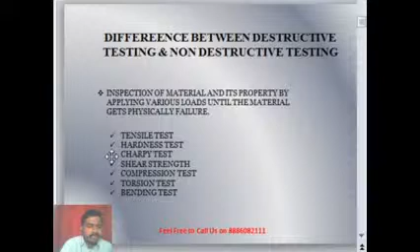So the disadvantages that we can discuss about destructive testing is the change in physical appearance, which cannot be used for further purposes. If I have a shaft of 10 centimeters, and I induce a destruction test for tension or compression on that particular shaft, I can't use it for any further type of operations or processes. Why? Because it has already changed its physical dimensions, so I can't use this.

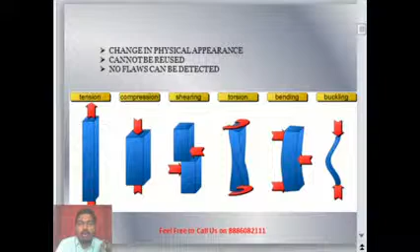And the third one is no flaws can be detected in this particular destructive testing. The flaws cannot be inspected or detected in destruction testing. The only purpose of destructive testing is to find the material property and material strength only. We can't find any single point of defect or any trace of defects.

And coming to non-destructive testing, here there is a small definition which everyone can understand, like any method for examining an object or a material or a job or a workpiece or a test specimen, anything, in any manner which will not impair its future usefulness. Why I mentioned many methods is, NDT is not just a single method, there are a number of methods involved in NDT. So that's why I mentioned any method.

So any method that you are going to use in NDT for inspecting a material, definitely it's not going to stop its future usefulness. Very soon after inspecting a component by NDT, you can also use it for its future purposes. That's why I mentioned a note, simply testing without destruction. We are going to test a component without destroying its physical mechanical properties.

And the result that we are going to get by doing NDT is, we can see whether there is any flaw or air gap or defect in a particular component. If there is a flaw in a particular component, we can't conclude that component is going to be accepted or is safe for future purposes. So before getting into market, any product or any material is going to be tested quality wise, and the test carried out for quality inspection is called NDT inspection.

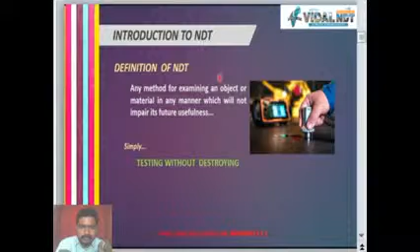And getting into detail, why NDT and where we are going to use this NDT. Firstly, we are going to detect the internal and external flaws of the component.

Internal and external, I specially mentioned, we can also find the internal components. Like if I have a 10 centimeter component, I can see whether there are any surface defects by our naked eye, but we can't see the internal defects through our normal human eye. But by using these types of NDT methods, we can find both the internal and external flaws that are present in the component.

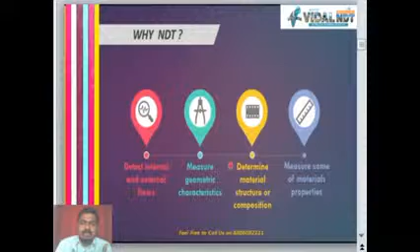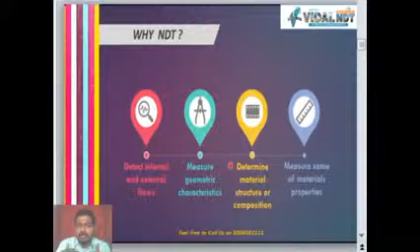And secondly, measuring the geometric characteristics. Measurement is nothing but, if we have a scale or a tape, we can simply measure any component. But there are some things that have to be measured only by using NDT. Why? Because if there are some internal dimensions which are very important, like the length, breadth or width of an aeroplane or a turbine blade, we can't see the length or thickness of the turbine blade by using a normal centimeter scale. We need other types of measuring devices like NDT.

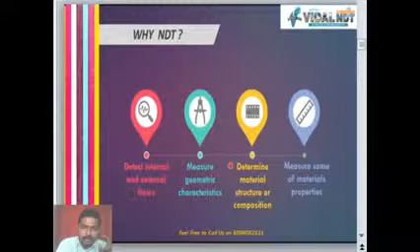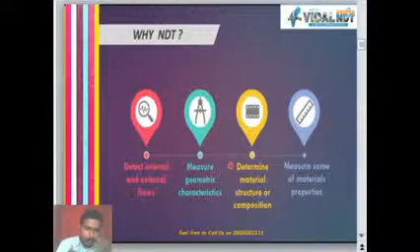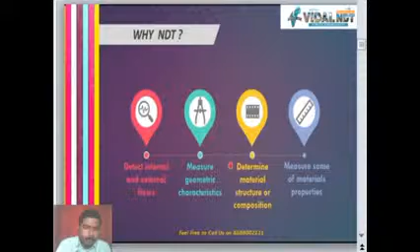In NDT there is a particular test called ultrasonic test, so by using this ultrasonic test we can also check the thickness of any component. Okay. And next, we are going to determine the material structure or composition. Like we have already discussed, in ultrasonic testing we are going to know what type of material we are testing, and what is the percentage of composition of one material to another. We can conclude this by using NDT testing.

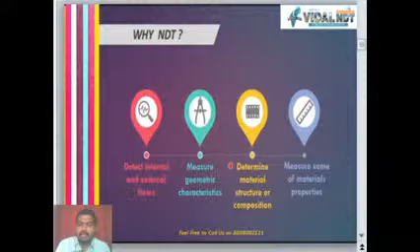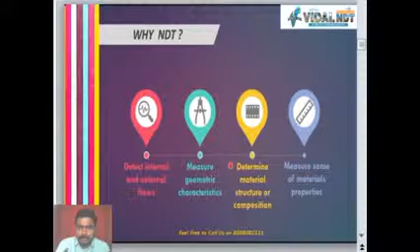And next, measure some material properties. Material properties relate to the structure, and by knowing the structure and composition of a material, definitely we will know the material property. But one thing I can say is, we are not going to check any physical or mechanical properties. We are just going to find the structure and composition, not strength and forces. Okay. And for the next slide,

the various applications of NDT: we can use NDT in aerospace industries, aircraft industries, automobile, forging, casting, chemical and petroleum industries, construction industries, electronics and food processing, marine, material joining, security purposes, metals and even non-metals, nuclear, ordnance, transportation and utilities. Hopefully all these key points are familiar. The points which I feel are non-familiar are construction, ordnance, utilities and even food processing.

So in construction, as I discussed in the previous session, along with mechanical industries, the construction field also has many applications and advantages of using NDT. So it's not only focused on the mechanical stream, it's also focused on the construction stream and medical applications as well. Food processing, in the sense, we are not going to inspect the food here. We are going to inspect the machinery or mechanical tools used in the process of food processing. And ordnance is like military tankers, etc., which come under ordnance.

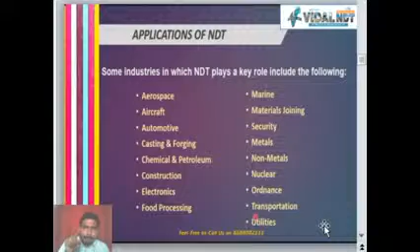And utilities, you can say anything. In any industry, it might be gas, water, or anything, any component or part individually we can call utilities, like pipe joining, L joints and T joints, anything. These all come under utilities. So we can also inspect these types of individual components by using NDT.

And the basic NDT methods that have been used so long and so widely: there are 6 NDT methods. So what are the 6 methods? Before getting into them, I need to explain why they have been categorized. Actually there are 14 types of NDT methods to do an inspection of a single component, but we are going to discuss only 6 in today's session.

Why? Because only these 6 types of NDT methods have been familiar for more than 10 years in mechanical industries, and only these 6 methods are much easier as well as much more useful, both on the financial side and the result side. Very low cost and very high effect by using these 6 types of NDT methods. And the NDT methods have been categorized into 2 different categories.

First one is conventional testing and the second one is non-conventional testing. The non-conventional testing is nothing but a quality assurance check, a process that is followed after the quality inspection. Not all industries need this type of testing called non-conventional testing; for example, laser treatments, resonance testing, photographic view testing, etc. come under non-conventional types of testing.

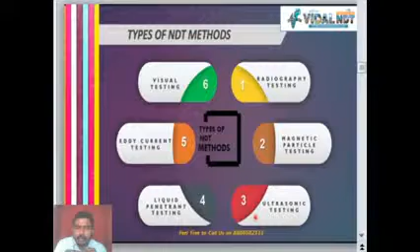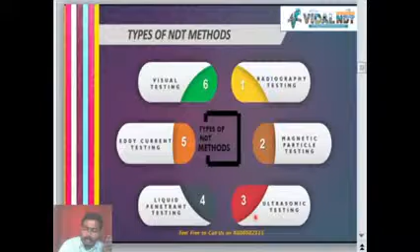So in order to know the length and other dimensions of the defect, we need to inspect through visual testing. Only then will we have a proper record of that particular defect, and then we can conclude whether it is accepted or rejected. Now we will go to the individual types of testing. The first and foremost is radiographic testing. As I said earlier, this is a type of test in which radiation is used to inspect a component.

Why? Because only X-rays and gamma rays have the capacity to penetrate into a component. Only then can we find whether there is any defect inside the component. No other radiations like radio waves or microwaves have the capacity to get into the component. Only X-rays and gamma radiations penetrate into the component and trace the gaps and structures internally, and make a note, and that note determines whether the component is acceptable or non-acceptable.

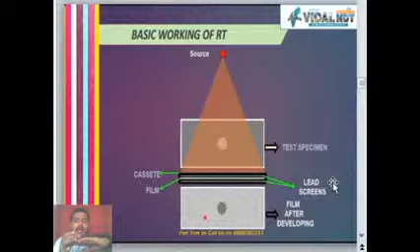We don't get results immediately after directing X-ray radiations upon the film - there are particular processes to carry out afterward. If this is the component and my hand represents the film, I need to induce radiations upon the component. These radiations pass through the component and fall on the film, which saves all those results.

To make sure we can see these specifications on film, we need to undergo a process called film development, which involves 5 different steps. The first is developing, then stopping, fixing, washing, and drying. After doing these 5 processes, we can see the image that you are seeing on screen right now.

After the film development process, the white colored image will turn into a developed film in which you can notice all the types of defects existing in the component. If there is no defect in the component, there will be no black color indications upon the film. Hope you are clear.

One more thing I need to conclude is that radiation testing is very harmful to the human body, but no industry is going to ask a man to die to do an inspection of a component. An industry definitely gets legal authentication or authorization for these types of testing, and makes sure the person who undergoes it is safe, with precautive and preventive measures against these radiations.

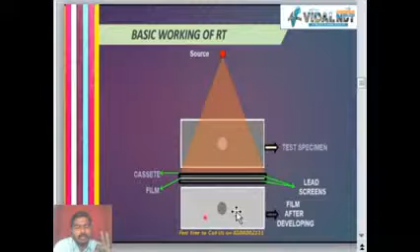There are only 3 basic factors we need to note as precautions for RT: maintain distance from the inspection area to the human body. If this is the source point, we need to have maximum distance away from it. Very soon after switching off the radiation, we can go and adjust the further things.

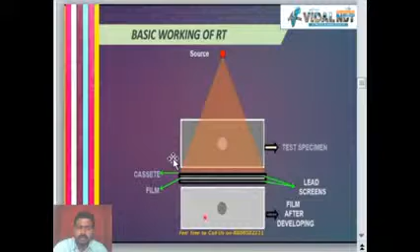It's not as simple as I said just now - actually it is very tough, and we need to have particular courses to do RT testing upon the material effectively.

What makes this type of testing vary from others is the type of defects we can inspect in radiographic testing: hidden defects and volumetric defects. I say hidden because internal flaws or internal component defects cannot be seen or visible through our normal eyes. Volumetric defects means we can see the particular shape and size of the defects of the component. So the types of defects we can note using radiographic inspection are hidden defects and volumetric defects.

The type of results we can attain in radiographic inspection is permanent results. For example, even one of you or your neighbors may have taken X-rays, and those X-ray results will last for many years - nothing will happen to them. The results will stay as they are in the X-ray film.

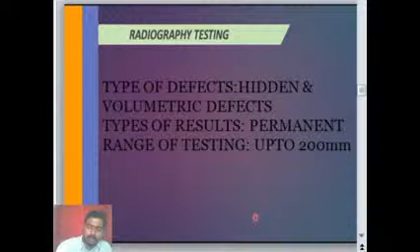Next type of inspection is magnetic particle inspection. Here, as I said earlier, we are not going to inspect a magnet, and we are not going to inspect by using a magnet, just we are going to inspect a component which can be magnetized, called ferromagnetic material. Magnetic particle testing, or MT, is done by inducing a magnetic field in a ferromagnetic material and dusting the surface with iron powder.

What is ferromagnetic? The material has been divided into three major types: dia, para, and ferro. The example for dia is gold and silver, which cannot be attracted to magnet. Para is aluminum, which can be partially attracted to magnet, and ferro, which can easily get attracted, and the impact of attraction will also be heavy. For example, we can consider steel and cast iron or iron.

So we can do inspections of only cast iron, steel, and iron components in magnetic particle testing. Not all types of components can be inspected in magnetic particle testing, and these particular components are technically denoted as ferromagnetic materials. No need to be worried or tensed, because all kinds of mechanical industries will prefer only iron, cast iron, or steel type of components due to their high strength or flexibility of making a product.

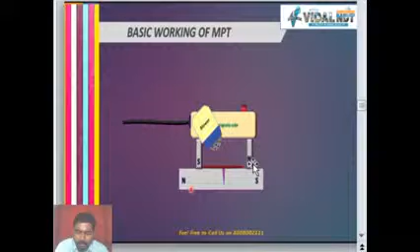So after applying magnetic powder upon this area and removing the yoke, we can see the particles have remained at a particular surface or part of the component. Why? Because behind those particles there is a presence of a defect, and the rest of the surface has no defects and gives a very clear cut image. So in this area there is a defect, and as an indication of the presence of the defect at that particular area, the particle has stopped upon the surface.

Is it clear? I will also explain it in Telugu, no issues.

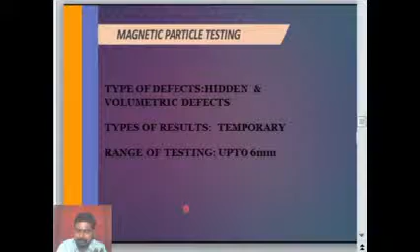Okay, coming to the next type of testing, the very important testing and my personal favorite, is ultrasonic inspection, in which we use ultrasonic sound waves to inspect whether there is any flaw or defect in a component. So ultrasonic testing, UT, uses the transmission of high frequency sound waves into a material to detect imperfections within the material or changes in material properties.

We will have particular probes called transducers, which convert one form of energy into another. By giving electrical energy to the probe, it converts that electrical energy into ultrasonic energy and starts directing it into the component. Here you can see a blue and white device on the component, right? This is called the probe, through which we send high frequency ultrasonic sound waves into the component. These waves pass into the component and are reflected back after reaching the end, and the reflection is also received by the probe.

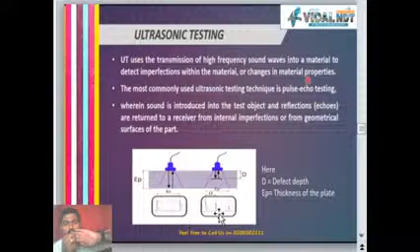this area. And coming to here, I have another material being an inclusion here. So it will not pass until the end. It will just be reflected from the surface and will show an echo which is reaching earlier than the surface. And the most commonly used ultrasonic testing is called the pulse echo testing method.

The indication of these echoes is nothing but pulse echo testing, wherein sound is introduced into the object and reflections like echoes are returned to the receiver from the internal imperfections or from the geometrical surface of the part. As I said earlier, as the ultrasonic sound wave is passed into the component, it will not pass after the component. If there is any air gap, it will just reflect back.

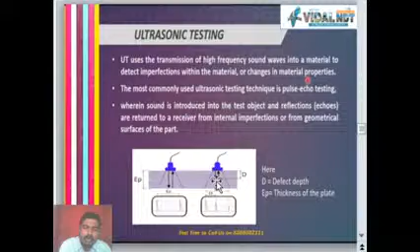In the same way, here also the defect is one type of air gap, isn't it? So the ultrasonic sound waves can be reflected from air gaps also. In clear-cut vision, see, I have a component here, a cylindrical type of component, and I have a display here. So I'm going to direct the ultrasonic sound waves onto the component, and this is the starting point and this is the ending point.

Just assume it has a thickness of 200 mm. Okay, the starting point is 0 and the ending point is 200 mm. So as the ultrasonic sound waves are directed into the component, there will be an echo at the starting part of the screen, and this echo is going to indicate that the ultrasonic sound waves have been transmitted into the material. Once the sound waves start traveling into the component, this echo will appear on the CRT screen.

Once the sound waves get reflected back, you can also see another echo at a particular point on the screen, and this point indicates the thickness of the component. Here the first echo will be at 0 and the second echo will be at 200 mm. Why? Because the thickness of the component is 200 mm. It starts from 0, which indicates the initial echo, and reflects from 200 mm, which indicates the back wall echo.

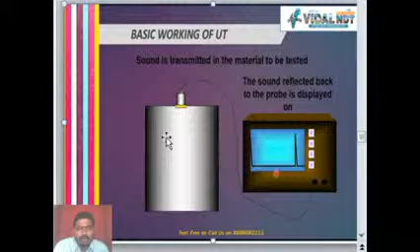If there is any gap or hole inside the component, if I place the probe upon the component, just assume the cursor is a defect, then the ultrasonic sound waves will pass into the component, onto the cursor, and will not pass beyond the cursor. It will just reflect back from the cursor. So I can also see another echo in between the initial echo and back wall echo, which represents a flaw between the starting point and ending point of the component, which can be termed internal flaws or sensitive hidden flaws. Okay.

And coming to the conclusions of ultrasonic inspection, ultrasonic inspection is a methodology in which we can detect hidden and sensitive types of defects in a mechanical component. Hidden defects are those which cannot be seen or visualized through the normal human eye. And sensitive defects means we can sense a defect of 0.1 mm diameter also by using this ultrasonic testing.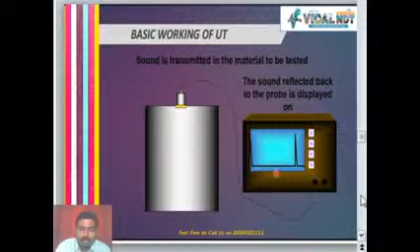And the type of results is echo form. As we saw in the previous slide, the results have been visualized in echo forms. So the type of results will be echo or digitalized also. And if we need the results for future purposes, we can save these results in devices called Modsonic machines, flaw detector machines, or digitalizer machines, etc. There are many models in ultrasonic testing.

We can use this type of testing not only in mechanical fields, we can also use it in medical applications and construction applications. Okay. In medical applications, to see the baby inside the mother's womb, the type of testing the doctors carry out is called ultrasonic testing.

Okay. The screen will give you the visual of a baby inside the mother's womb, isn't it? In the same way, by using ultrasonic testing on a mechanical component, we can also see whether there is any flaw or any other material incompositions or inclusions inside the component.

And what is the range of ultrasonic testing? It is 6 meters. We can inspect any component up to 6 meters by using ultrasonic inspection. I have just mentioned 6 meters, but I can say it is infinity. Why? Because no other material will have a thickness more than 6 meters in the mechanical field. If you consider an aeroplane, the biggest aeroplane might be half a kilometer in size, but the thickness of the aeroplane will definitely not cross 6 meters, isn't it?

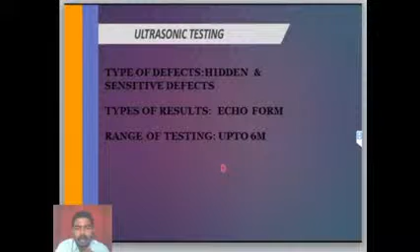The thing is, we need to change the velocity and speed of the ultrasonic sound waves so they can pass easily according to the change of medium. Okay, there are three different types of sound: audible sound, ultrasonic sound and infrasonic sound. Of those three, we have chosen only ultrasonic sound to do this type of testing. Why? Because only ultrasonic sound has the capacity to get into a component. No other sound can get into a component.

For example, even when I am speaking, there is a sound called audible sound. Of course it is also a sound, but I can't use this audible sound to inspect a component. Why? Because audible sound will definitely get reflected when it faces a rigid body. See here, if I'm speaking with my hand in front of my mouth, my hand will reflect the sound, isn't it? So the sound is not going to travel into my hand, and I cannot trace what is happening inside my hand, isn't it?

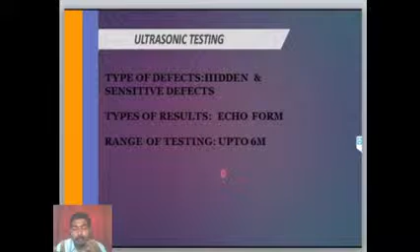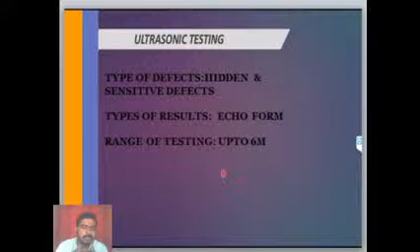In a simple way, the audible sound cannot pass into a component, so we cannot trace whether there is any defect present in the component or not. Only ultrasonic sound can; ultra means the highest frequency of sound. If I shout, it's not called high frequency; that is intensity, not frequency. Actually, we cannot hear ultrasonic sounds. Sound is nothing but a form of vibration, isn't it? Ultrasonic sounds create higher vibrations than audible or infrasonic. Hence we use ultrasonic sounds to inspect a component.

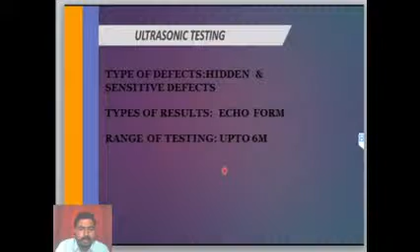Coming to the next type of testing, the liquid penetrant test. It is one of the easiest and simplest methods of NDT. So what is the liquid penetrant test? It is a type of inspection using a liquid penetrant or dye on the component, which shows surface cracks or surface defects. It has many names in industry: dye penetrant inspection, penetrant testing, dye penetrant testing, DPT, PT or LPT. The common, familiar terminology is liquid penetrant testing.

In the liquid penetrant test, we use different types of chemicals upon the material surfaces and test whether there are any defects on the component or not. Coming to the key points, PT, the penetrant test, is probably the most widely used NDT method. The test object or material is coated with a visible or fluorescent dye solution.

Dye solution is nothing but, as I said earlier, we are going to use some chemicals to find out the surface defects. We are going to apply these chemicals on the entire surface of the component, and the excess dye is removed from the surface and the developer is applied. The excess is not removed very soon after application. We need to have some dwell time after applying a penetrant. We need to wait for 5 to 10 minutes, and then we need to remove the excess penetrant upon the component.

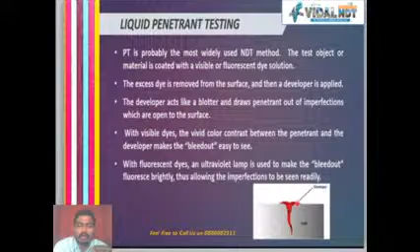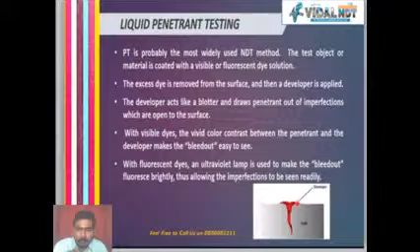The aerospace industries use fluorescent testing for high sensitivity or visibility of defects, whereas normal mechanical components or industries use visible inspection. Of course there is no change in process, like applying penetrants and types of penetrants; that will be common. But fluorescent testing happens in a dark room and visible testing happens in a normal room or open surface. That is the major change, nothing more than that.

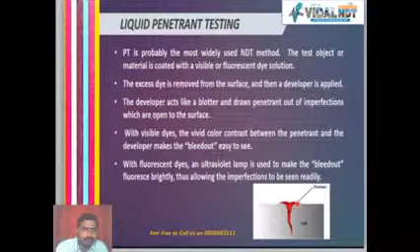And the fluorescent testing uses green colored chemical, whereas visible testing uses red or pink colored chemicals. Getting into detail, what is the procedure of liquid penetrant testing? This is the block on which we are going to do the liquid penetrant inspection. First of all, we need to clean this block using a chemical called cleaner. Why? The block looks clean already, but there will be small contaminants or dust particles on the component.

Okay, so we need to make sure that the component is free from dust or free from contaminants. Why do these types of testing this strictly? If there are any dust particles at this defected area... See here in the second image you can see a crack.

If there is a dust particle settling or present in this defected area, it will definitely not allow the penetrant to pass into the defected area completely. It will just stop the penetrant upon the component only. If the penetrant does not pass into the defected zone, we cannot conclude the inspection, we cannot see the defects, which indicates the test is not being carried out properly.

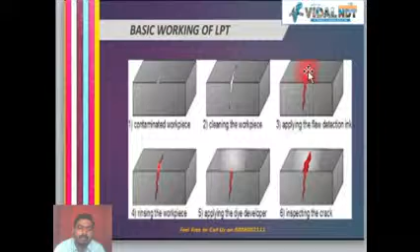Okay, and one thing is the cleaner will be colorless, there will be no color to the cleaner. It will be colorless, transparent. After cleaning the component and making sure that it is free from contaminants, apply the penetrant upon the component. See here, the red colored penetrant has been applied upon the surface of the component, and after applying the penetrant, as I said, we have to wait for 5 to 10 minutes. We have to give 5 to 10 minutes of dwell time to get the penetrant into the defected area.

Why? Because the defected area definitely will not be visible to our normal eye. If it is visible to our normal eye, we can conclude that it is defected and we need not undergo a process called liquid penetrant testing. Okay, so as I said earlier, we definitely need to do these types of testing to find the hidden and surface defects which cannot be inspected through our normal eyes.

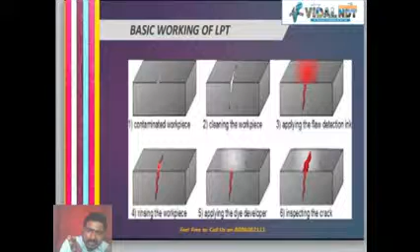If our normal eyes cannot see these types of defects, then you can understand how small or how thin they are. So these thin cracks or thin defects need much time to allow these penetrants or liquids to get into the cracked area or defected area, isn't it?

For example, if I have 10 liters of water and I need to pass it from one beaker to another beaker, if I use a higher diameter, it will definitely be faster to travel from one beaker to another. If I use a tube, it will definitely take more time compared to using a pipe. What is the difference between pipe and tube, right? The pipe has a higher diameter and a higher volume will be transferred easily, but the tube has a smaller diameter and a small volume can travel at a time, isn't it? So here we have to consider it as a tube.

Okay, and after giving the proper time, we need to clean the component. Why? Because the entire part is not defected. The defected part will already suck the penetrant into that particular zone, and the rest of the zone has to be cleaned properly and thoroughly. See here, only the penetrant is present in the defective zone. No other surface is having the penetrant on it.

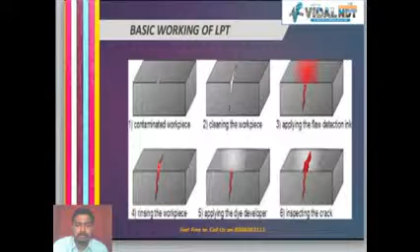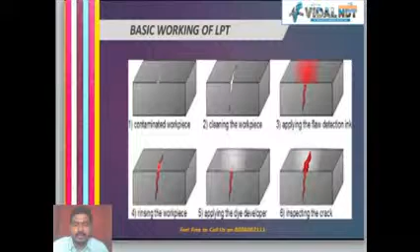As I said, we are using green color, red color, and pink color penetrant. Why not other colors? Because only these colors have higher wavelength and power of attraction, and the attraction of red will be higher. For example, if you see 100 members in a classroom, and one of them is wearing a dark red color shirt, definitely your eyes will get attracted to that dark red colored shirt. Why? Because it's the nature of red color - it has a higher wavelength and higher attraction power.

Of course, parallelly, pink also, dark pink also will be equally attractive and will be having higher wavelength. We are using pink color and dark red color as colors of penetrant in liquid penetrant testing.

And why green? Green, of course, is not higher in wavelength or highly attractive when compared to red and pink, but I have already said that green color penetrant is going to be used only in fluorescent type of testings, where we use ultraviolet light. This ultraviolet light will definitely make the green color light much more sensitive and brighter. No need of red color or any pink color here.

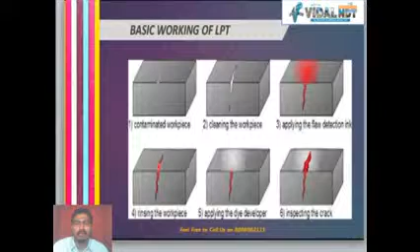The fluorescent type of testing will use green color penetrant, and visible type of testing will use red color penetrant and pink color penetrants.

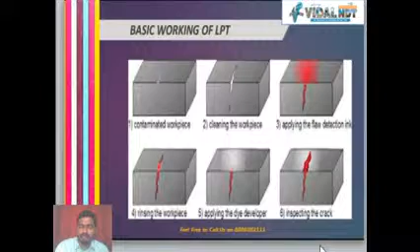I just said we have to apply the penetrant, or we have to apply the developer, etc. How do we apply it? Is it manually, or by floating the penetrant upon the component? No, the application also has some predefined processes or conditions. How should we apply, or what is the proper way to apply the penetrant upon the component? We can apply the penetrant however we want, but to make sure the process has been done perfectly and efficiently, we have to make sure it is applied in an efficient manner.

So again, there are 6 steps. The first step is cleaning the component by using a cleaner, which is no color, and secondly, apply the penetrant. The application of the penetrant has three different varieties - you can apply it by spraying, by brushing, or by dipping. You can apply the penetrant on the component by brushing it on, by spraying it on, or by dipping the component in the penetrant.

These methods vary according to the size and physical parameters of the component. We cannot dip a huge or large component in a beaker, so we use these types of methods depending on the component.

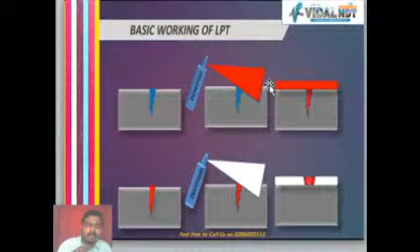If the penetrant is not getting sucked into the defects properly, then you cannot see the defects after applying the developer. If you don't see the defects after applying developer, the entire process is wasted and there's no use doing these tests. So you need to make sure the application of penetrant on the component happens clearly and thoroughly.

After applying the penetrant, you have to wait for 5 to 10 minutes. During this time, the defect area in the component will suck the penetrant into them.

After applying developer, a white colored layer forms upon the material surface. If you can see anything red appearing there, it is called a defect.

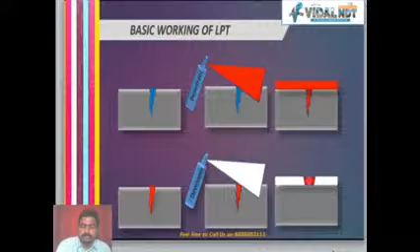The type of defects you can identify in liquid penetrant testing are open surface defects and surface defects. If there is no connectivity or flowability from the surface to an internal part, the penetrant will not flow there. If there is a small hole inside the component with no way for the penetrant to pass into it, it cannot be visualized by the developer. So the only type of defect inspectable in liquid penetrant test is open surface defects, where there is connectivity or flowability of penetrant into the defect.

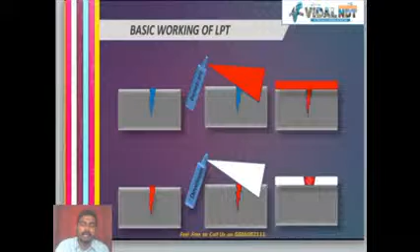The type of results you get is temporary results. After doing all these steps and seeing the defect, you need to record it on paper or take photographs very soon, and then clean the surface. Once you clean the surface you will not see the defect again, hence it is called temporary results, not permanent results like in radiographic testing.

Even in ultrasound testing you can save the results, but in liquid penetrant testing you cannot save the results.

The range of testing is only 2 mm. That's why only surface defects can be identified or detected in liquid penetrant test; no other types of defects can be identified or traced.

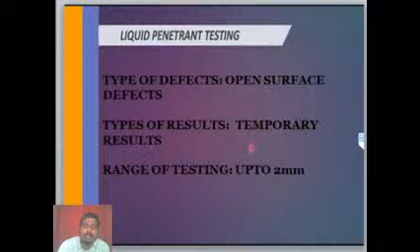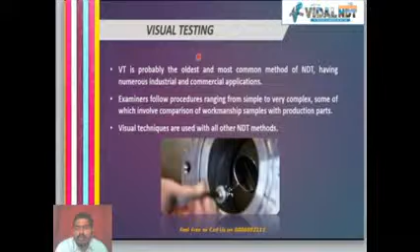Coming to visual inspection, VT, that is visual testing, is probably the oldest and most common method of NDT, having numerous industrial and commercial applications. For scaling or measuring a particular area, size, or dimension in physical properties, we need visual inspection, which was widely used even before the times of NDT, not just within NDT.

The examiner follows procedures ranging from simple to very complex, some involving comparison of workmanship samples with production parts. For example, if I'm manufacturing a scale of 15 centimeters, I need to measure whether the readings are right by using another scale. That's much simpler, with no need to put much concentration into that type of measurement.

But when it comes to very complex cases, take a turbine blade for example. The inclination of the turbine blade from its starting point to ending point should remain in the same inclined direction. If the direction of inclination changes, the turbine or propeller will not be efficient in its input or output. So measuring the inclination of direction from start to end of the turbine is not easy, it's very complex. Measuring a scale is simple, measuring a turbine inclination is complex. These visual inspections can range from the simplest type of testing to very complex types of testing.

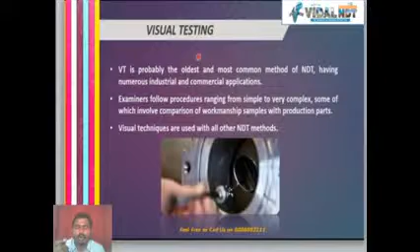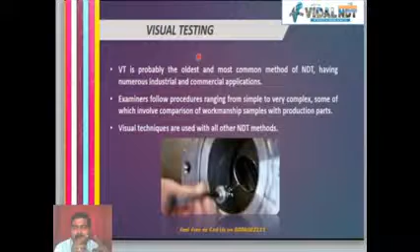In NDT there are many certifying bodies governing these NDT certifications. In India, it is called ISNT - the full form is Indian Society of Non-Destructive Testing - but it is valid only in India.

There are three important governing bodies of NDT. I mention two here: American Society of Non-Destructive Testing (ASNT) and Canadian Institute of Non-Destructive Evaluation (CINDE). These are the major governing bodies because if a person has certification from ASNT or CINDE, it is valid worldwide, not only in America or Canada. If I have an ASNT certification, I can take it anywhere in the world and it will be valid, whereas ISNT certification is valid only in India.

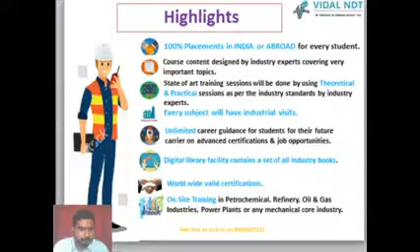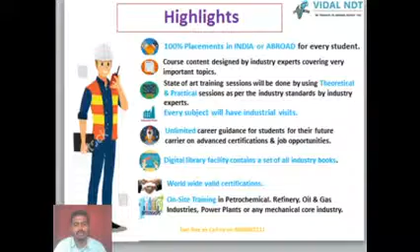We have a digital library in our institute, and worldwide valid certification. As we are providing ASNT certificates, they are valid for the entire world. You can do the course in VIDAL NDT and do the job in America also. And yes, on-site training in petrochemical, refinery, oil and gas industries, power plants, or any mechanical core industries. We also provide proper industrial visits, industrial expos and internships if the individual is interested.